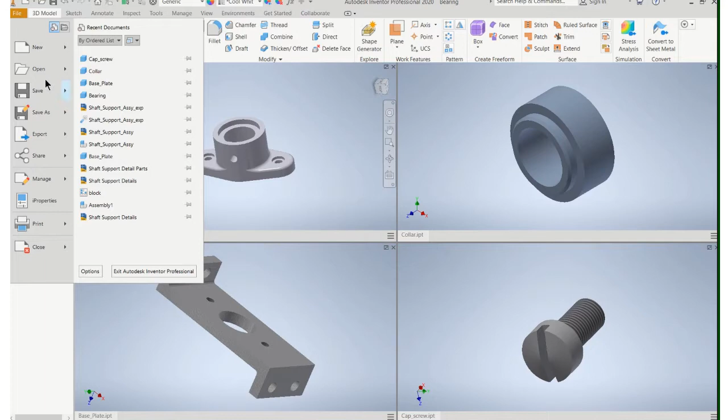In this video, I'll show you how to put the 4 parts of the shaft support assembly onto a single sheet. So let's go and start a new drawing. So I'm still not going to use a D size, but I am going to have you use a C size paper. That's as big as I ever want you to use, C size, because we're going to put a lot on this sheet. Please don't, if you send me a D size, I'll have to send it back to

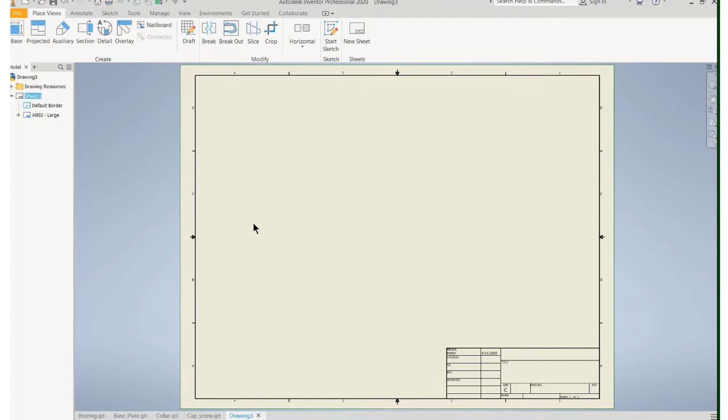you. Okay, so base view. Now let's choose our parts. I'm going to start with this base, and we're going to have to scale this down because we're going to try to fit, half scale is probably good, fit all these details on here, and let's find a good front view. Remember, do not let the software decide what your front view is going to be. Find the front view that gives you the most information, fewest hidden lines, longest dimension.

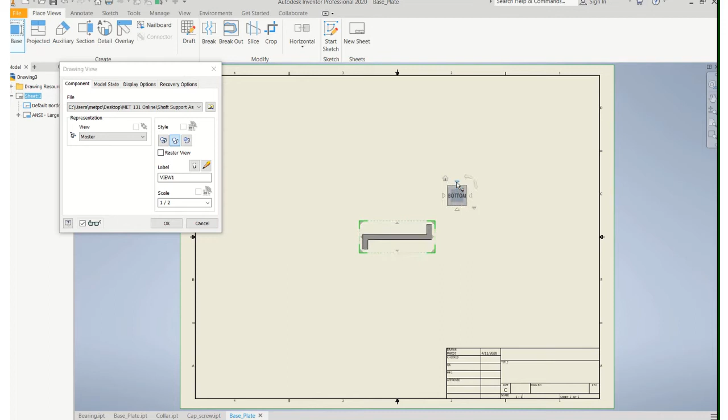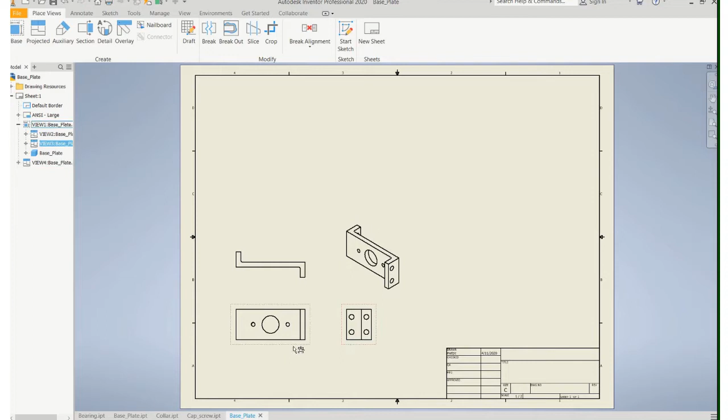I think that's going to be our front view. Okay, top view, right side view, and our ISO. Right click and say okay. I may change that after I get going here. Okay, I'm going to put these 3 views down here in kind of the lower left hand corner, and I want to leave myself room to dimension these. Now what I'm going to do, because I'm going to have multiple parts, is I'm going to label this. Oops, I need to turn on my hidden lines. So edit view, turn on hidden lines.

So let's label it. Let's go to annotate text, and let's put a text box here. And I want to put the name of the part, and it's going to be, oops, put my capital letters on. Base plate, and the part number. And this one's going to be part 31-003. And let's center that in the text box. So if you highlight that and go up there, it'll center it.

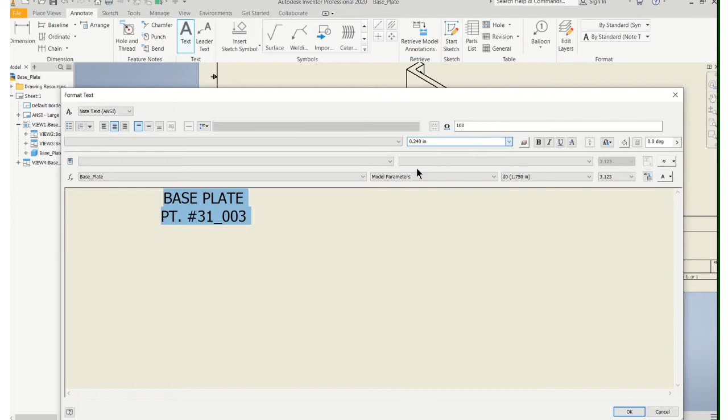That's going to be kind of small on the sheet. So also let's bump up the font size. So the default is 0.12. Let's make it twice as big. It looks gigantic here. It'll be fine on the sheet. There you go. Because we want it to be easy to read. Okay, so we can always move that around if we need more space. Let's go up to place views.

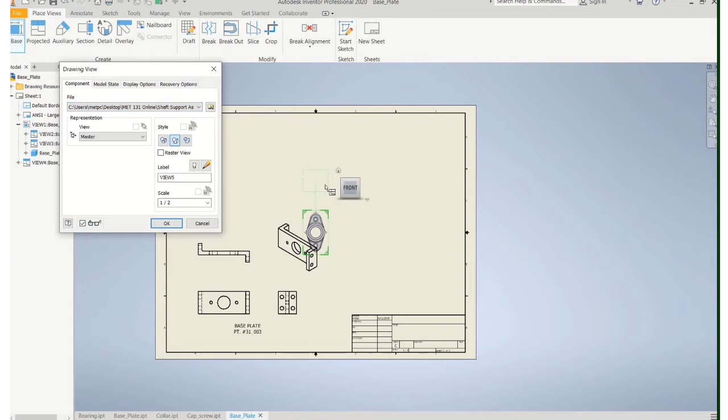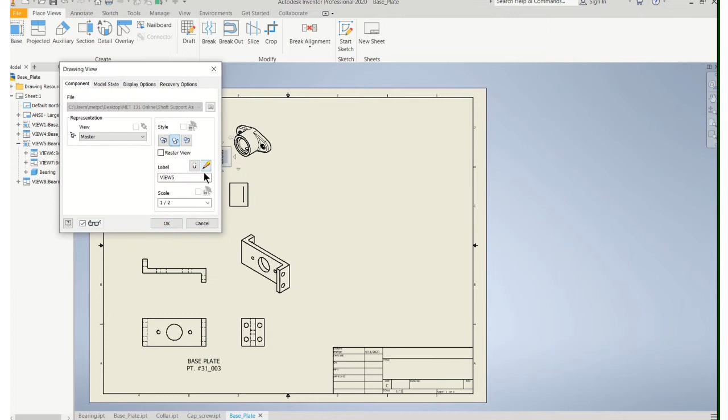Let's add another part. So now we're going to add the bearing. And again, let's pick a view that we think is most descriptive. I think we had it right there. So that looks like a good front view, top view, right side, and ISO. And let's tuck that in here. Again, I want to turn on my hidden lines. And that should work. Now again, I'm not sure how much space. Once I start dimensioning, I may need a little more room.

Now, I'm going to need a title for this, but the easy thing to do, since I have this all set up, is just copy this one. So just right click, copy, come up here, and paste it. Oops, I didn't want 2 of them. And let's just edit it. So double click on that, and let's just change that. And that one is actually the bearing. Or you can just start a new one, fine, it doesn't really matter. And that part number changes to part number 2. Say okay. All right, let's keep going.

So then we want to put our collar on there. Let's slide all these over here. Should have done that before I clicked out of that. Anyways, that's fine. And probably going to find the top view and the right side view are the same view. Right click, edit view, turn on my hiddens. I don't really need that top view. So those views like that will be fine.

And then I've got to put my screw in. Oh, let's go ahead and label it. So again, right click, copy, paste, and double click on that. And that is the collar. And the collar is part number 1. Oops, 1, okay. And let's add in now our cap screw.

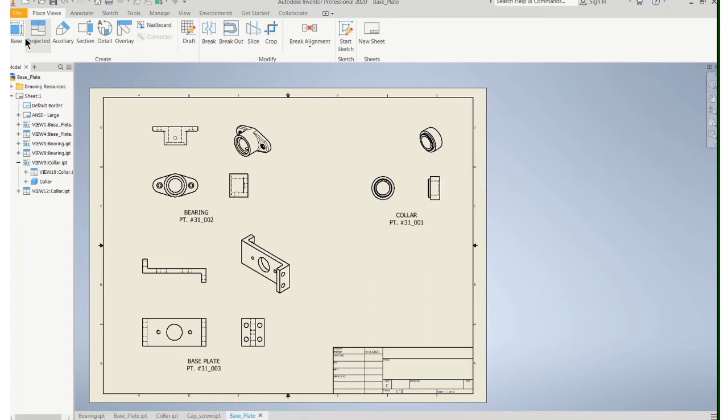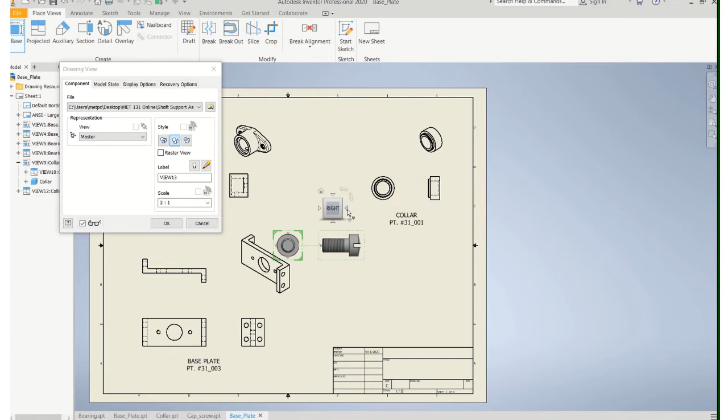Now it's gigantic, but let's find a scale. May have to have a bigger, like that's half scale. You can't even see the thing. So find some kind of a scale here. That's probably workable for what we're trying to do. Having second thoughts. I need to flip that. There we go. That's a much better view. The reason I flipped that is because I want to be able to dimension the head of that bolt.

Okay, we're going to also have that situation where the top view and the front view are pretty much the same. I'll just delete that. I don't need 3 views for that. Alright, so that's how much real estate I'm going to need. It should be fine, as long as I can get these dimensioned. You can always rearrange them, because these two probably need the most dimensions. We'll just see how it goes. It's easy to move this stuff around. Again, I'm going to copy that before I forget. Paste that down here. And that's the cap screw.

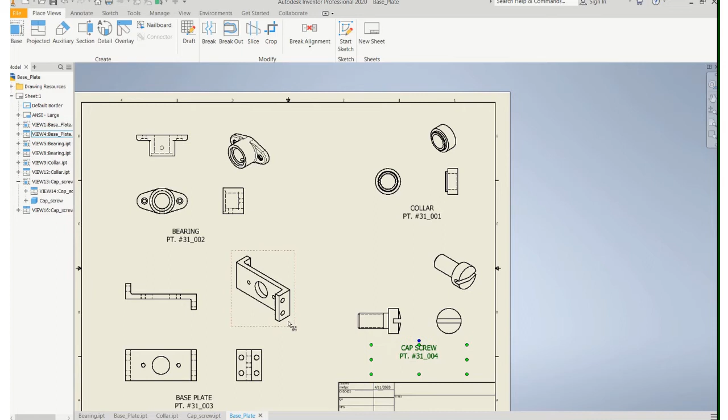And the cap screw is actually part number 4. Okay, so I'm sure I'm going to be probably moving stuff around as I go, but I'm in pretty good shape here. Try to not let the parts blend together too much. Make sure it's obvious what is what. Biggest concern is probably being able to get all these dimensions on here.

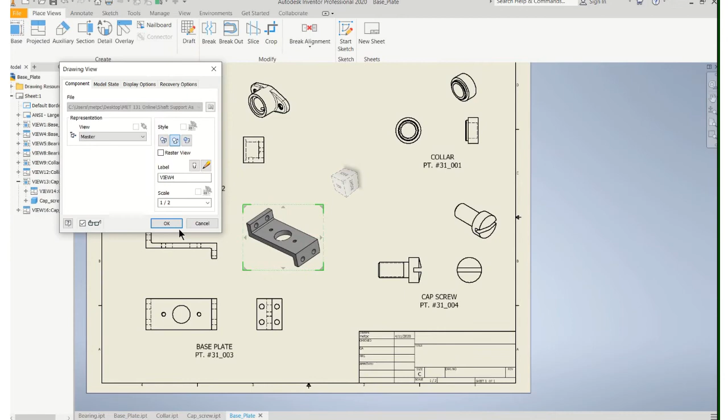I don't really love this view. Let's see if we can get a different view. And maybe that one's okay. I kind of like that sort of view like that. Also, it doesn't take up as much space. Yeah, that's better. Okay. So if you just zoom in on these, you should have room for dimensioning. Everything should be fine. So just do it as normal.

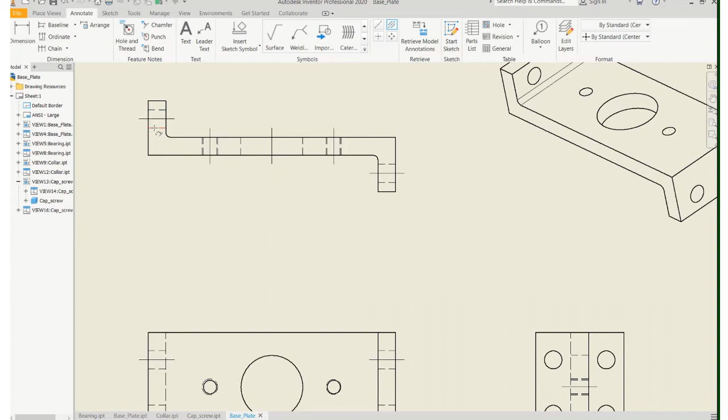Let's go ahead and put all of our center marks, center lines, just like we always do. Quite a few holes in this part here. Now these are threaded holes, so they're showing up as threaded holes because I made the threads on there. Remember, that double set of hidden lines indicates a threaded hole. And that's because I threaded them on the model. Okay, and center marks for the holes. And so forth. So you just want to go through and dimension all these views, include all the features.

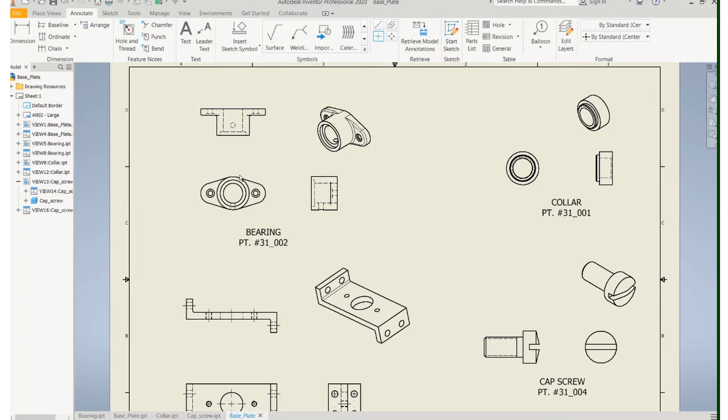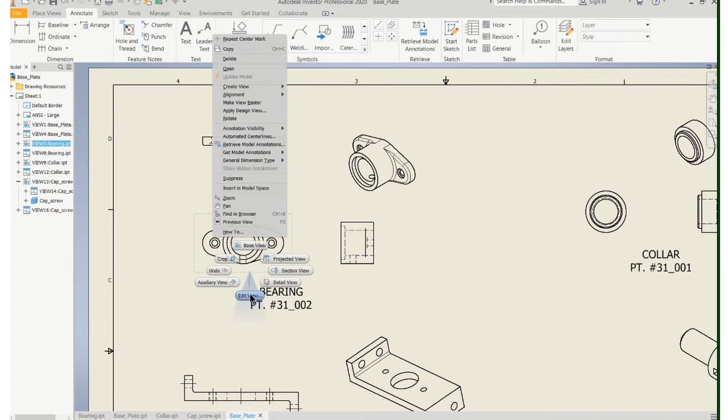I just noticed something here. This is a good front view, but I have a little bit of a problem because in that top view I can't see that hole. It's showing up as hidden, so there isn't really a good place to dimension it. So a couple of things I could do. I could reconsider this view before I do dimensions on it. Let's think if maybe we could, that is definitely not it. Oh, I know what we want to do. Keep going, there we go.

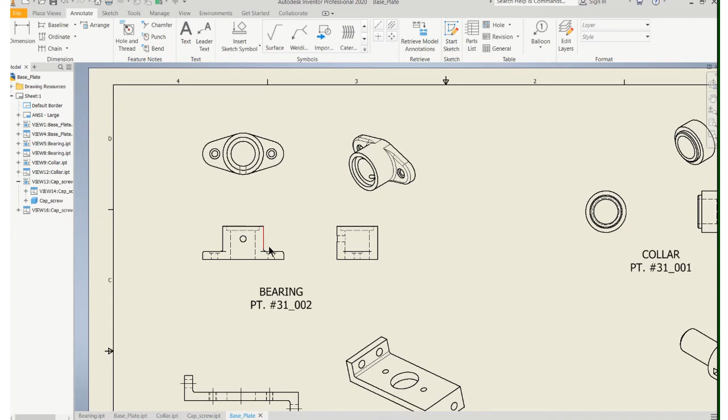So now I'm going to be able to see the hole. It's not hidden, so I'll be able to dimension it. I can see my counterbore, so that's probably a better view. That view's not great, but we know how to change that. Edit view, and again, get this thing the way you want it to look. That looks a lot better. And the rest of those should be good.

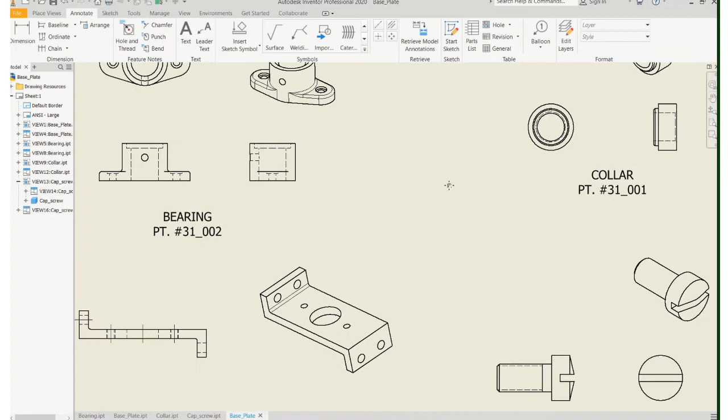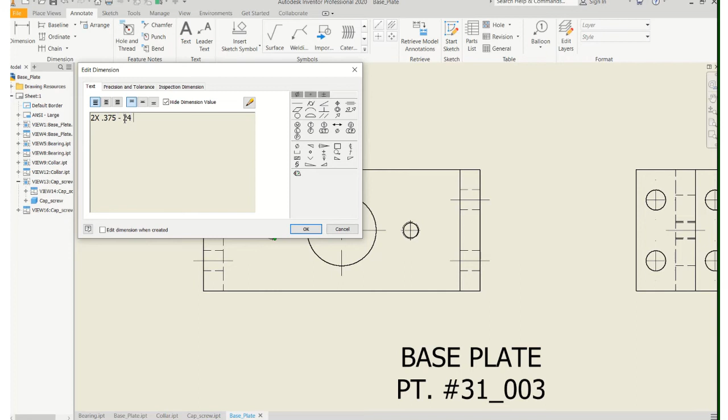On these, let's look at a couple things. Don't forget, these are threaded holes. They should show up when you put your dimensions on these threaded holes. Oops, let me try the other one and see. If they don't show up, you're gonna have to go in and edit those. So I tried dimensioning the outside and the inside. Just go in there, double click, hide the dimension, and turn that to a 2x, and that's a 3/8-24 UNF. So make sure you call out the threads when you have a threaded hole.

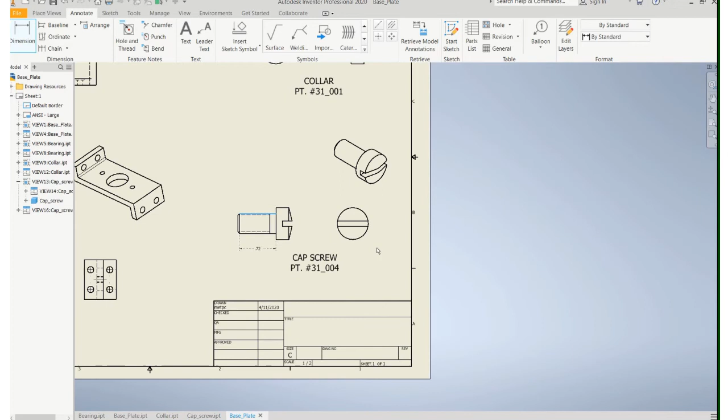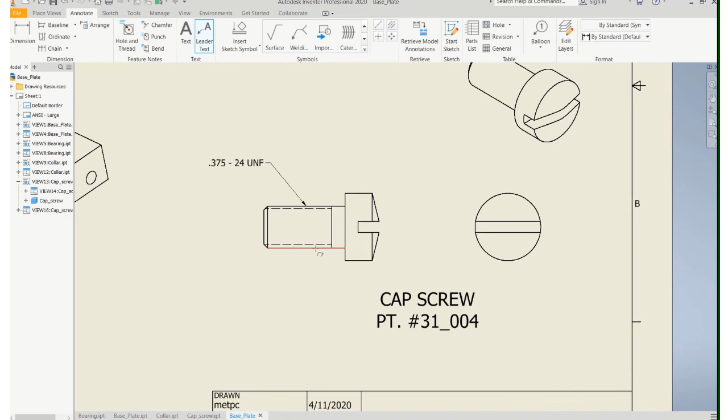Likewise on the cap screw. Not getting anything. Let's try it again. I'll just have to use a leader then. That's okay. Right click, continue, and then just type in what you want. And again, it's 0.375, 3/8-24 UNF. It's showing the thread, that's what that represents, but you need to call it out. Don't just call it the diameter. Make sure you dimension the slot. The rest of this is pretty straightforward, I think.

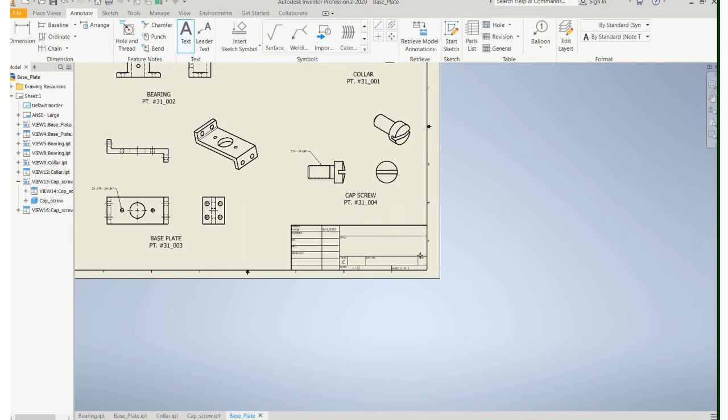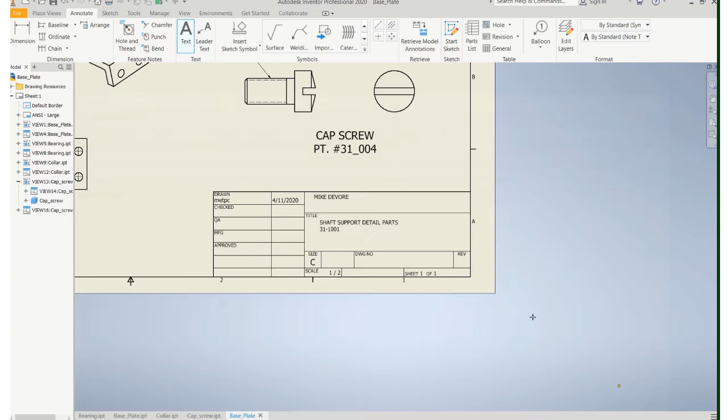Okay, so get all your dimensions on there. Everything is labeled. You're going to fill out the title block. In terms of the title block, do something like this. Let's call it detail parts. And then you would have some sort of a number on this. Let's just call that 1001. Say OK. And then also we're going to put our name up in there. It's nice to separate your name from the name of the drawing. And save it under that number. So when you're done, you should have something that looks like that.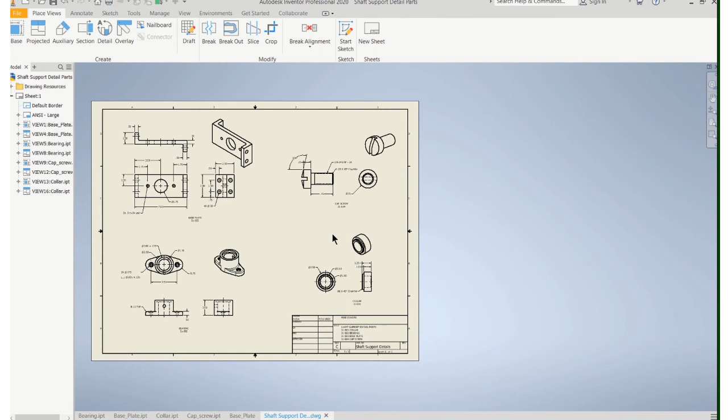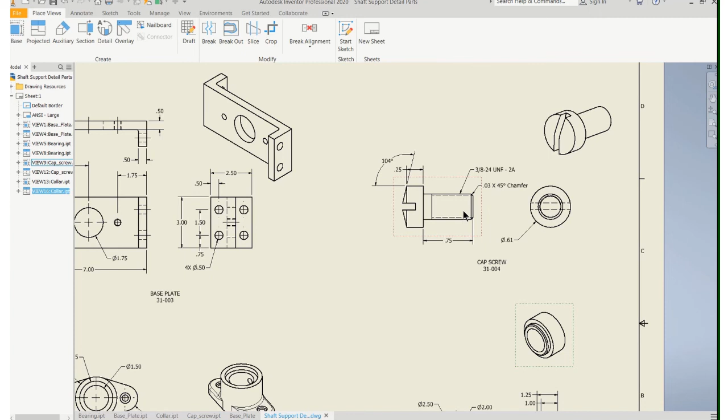Again, everything is fully dimensioned. You get your views. In this case, we deleted the top view. But always, if you have an option, do the front and the right and delete the top if they're the same. Don't have a front and a top. That's odd. Same thing here. I have a front and I have a right. I do need a couple of things still on here. I didn't finish this up, obviously. I need the depth of the slot and the width of the slot. So go through and make sure you have all the dimensions. The threaded holes are called out, the locations are called out, the threads on the cap screw.

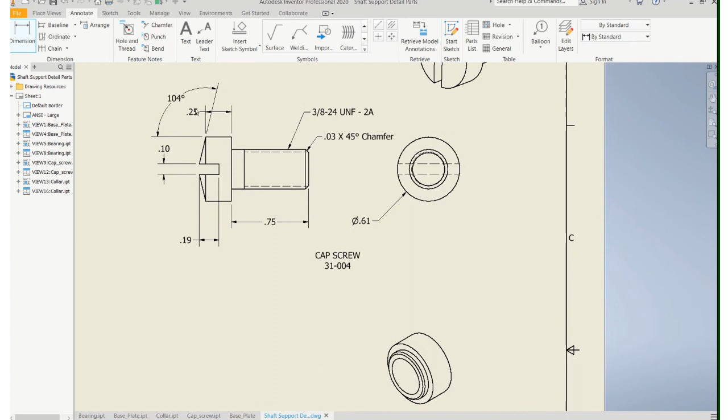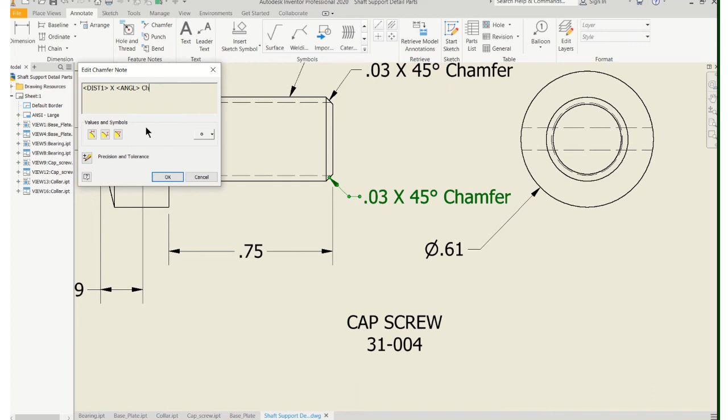Oh yeah, also chamfer. There is a chamfer tool up here for your dimensions. See it right there? Just click two lines. So click that line and that line. I don't think I got it. That line and that line, and it'll give you a chamfer dimension. Now it takes up a lot of space. If it does take up too much room, you can go in there and take off the words. It's pretty obvious what it's telling you. We've talked about that before.

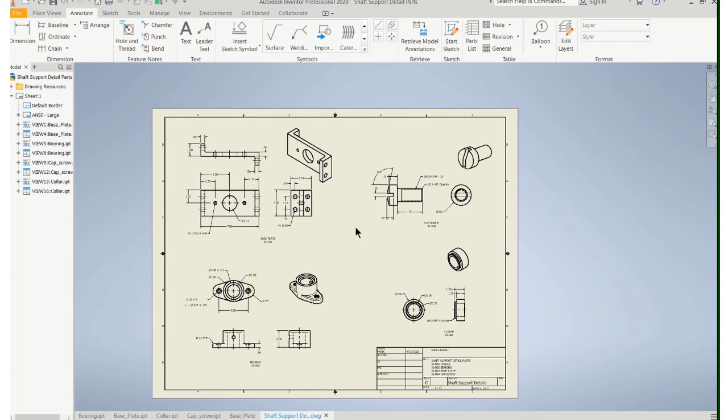Okay, so that way you can present all of your detailed drawings on a single sheet. So we'll have you turn in a full assembly on a B-size page, an exploded assembly on a B-size page, and then all of your details on a C-size page. Don't forget to fill out the title block, all dimensions, all the information.